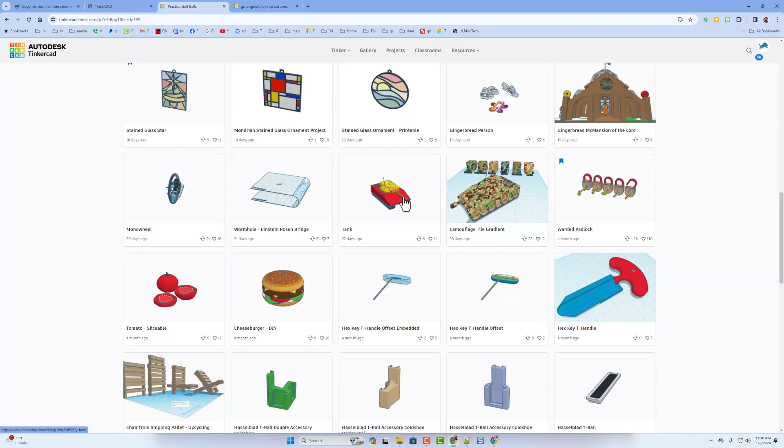Now he's also got the gradient. We're going to use both of those, but these are the steps you need to know. First, click on the design and then follow the golden rule of Tinkercad. Before you ever copy and tinker, make sure you give them a reaction. Then when you hit copy and tinker, after a moment it loads and we can start checking it out.

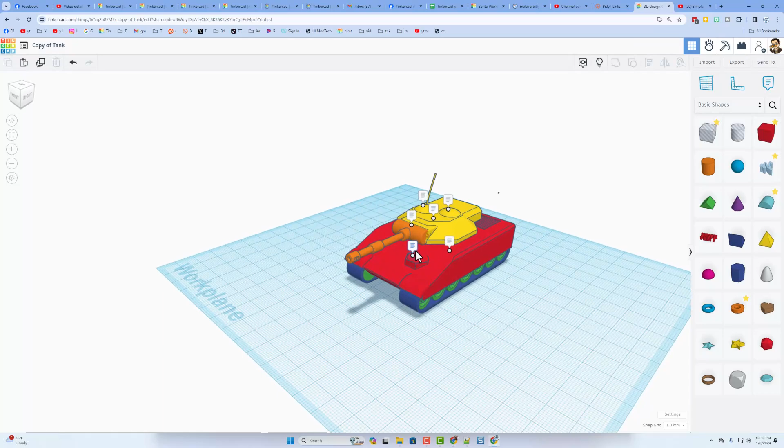ZDP was cool enough to add some notes. Let's check them out. The goal was to make a respectable looking tank that's quick and easy to draw using shape parameters. It only uses 75 shapes. That's pretty sweet. Notice here we've got a driver's hatch.

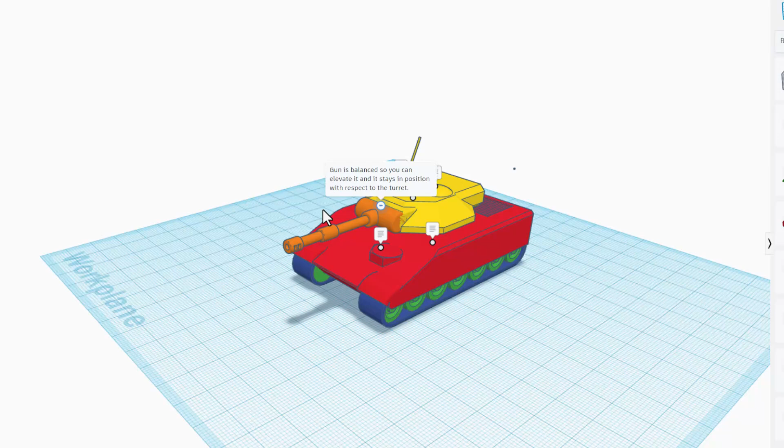Up here we've got a note that the gun is balanced so we can actually elevate it and it stays in position. There's also a cool note that if we select the turret and the gun, we can rotate them together. Finally, there's a gunner and a loader's hatch, and there's a commander's hatch.

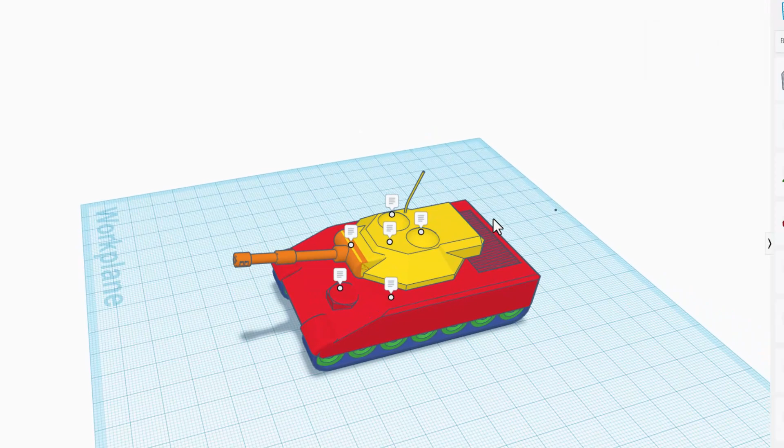So let me show you how this works. There is a tiny dot on it that balances it so it rotates around this center. Super slick technique. Now what ZDP said a moment ago is if you shift select these two, this dot, notice that link puts it exactly in the middle, and it rotates like that.

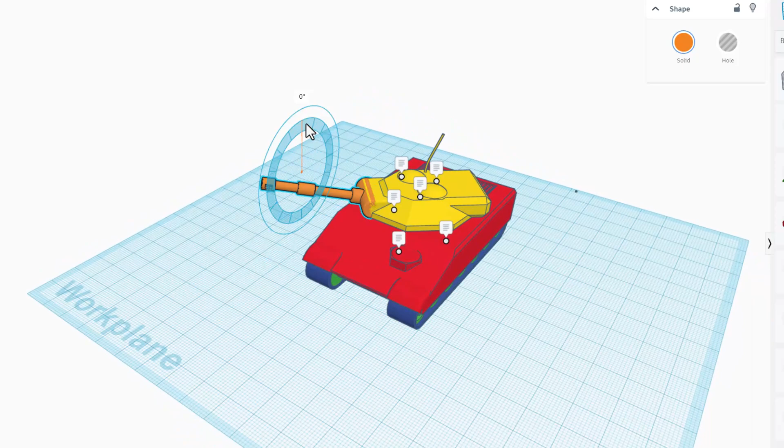Now I do have one thing I do want to show you. If you click off that and try and rotate this now, it does not work. It's in the wrong spot. So I'm going to do Control Z on that rotation, and I'm going to show you how to make it work. Notice how this is about the exact same angle.

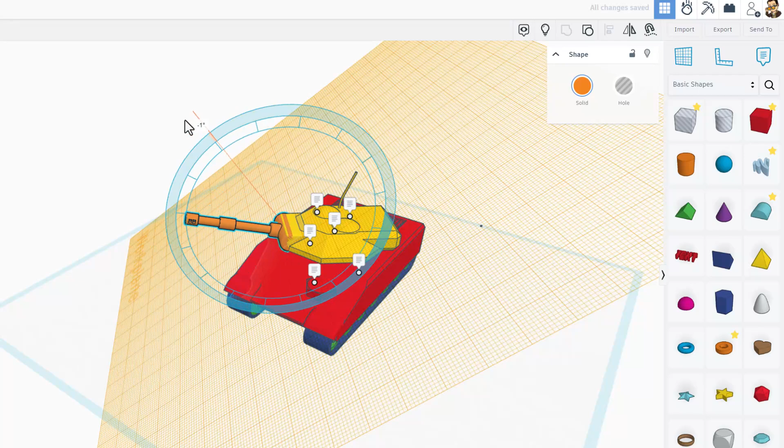If we simply put the work plane on that spot, so click work plane and set it right there, now that would rotate again if you wanted to adjust it from that angle. I am going to undo that by putting the work plane back and doing Control Z, Control Z, and Control Z. And then I'm going to shift select those two, and I'm going to get my turret back straight for the cool modifications we're going to do.

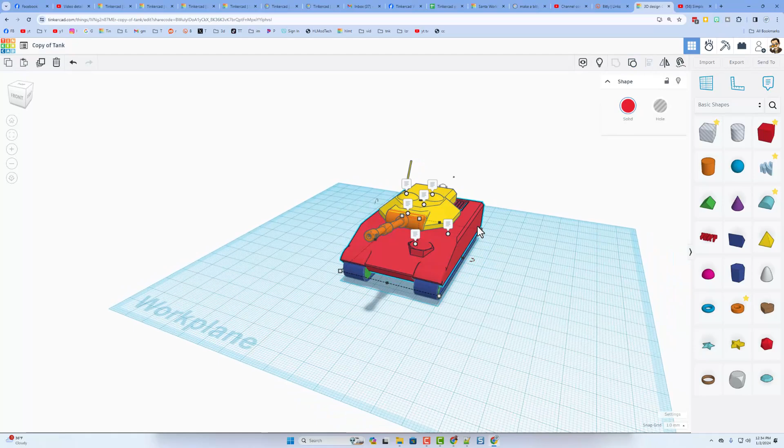I do also want to highlight that part of copying and tinkering is tearing things apart. Now you don't want to lose the original, so you can do Control D, do some shift nudges, and move that off to the side so you can always go back to how it looked.

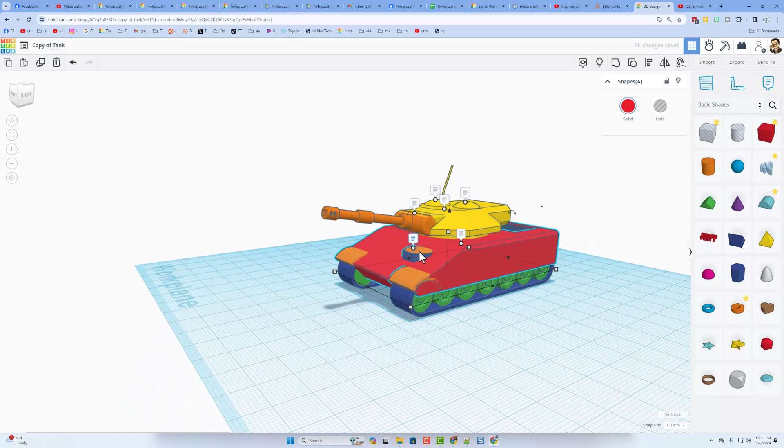But now you can click on shapes and ungroup them to see how things were created. Cool little curves added to the front, and there's the hatch. If you wanted the hatch to be a different shape, you can adjust it however you wanted. This is what copying and tinkering is all about.

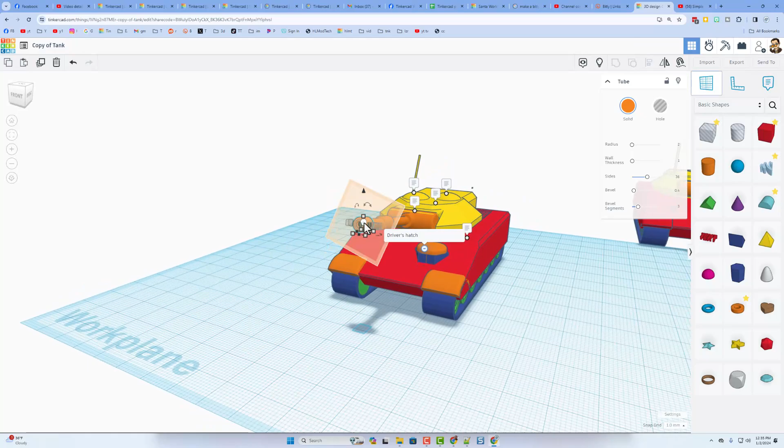You want to adjust your barrel? Ungroup it, click on a piece you want to change. I'm going to get the work plane so it's the same way, and I'm going to stretch it out, because I want it that way. Finally, put the work plane back down and make sure you group shapes as you make a mod.

Now for the rest of this, I'm going to back that up so it looks just like ZDP had it. And friends, let me show you something else pretty epic.

ZDP also has epic gradients. These are awesome camouflage, super cool, but I have an idea to use another user's cool share. This is by the Donut King. Once again, we will click on his profile to see all his awesome projects. Definitely worth checking him out.

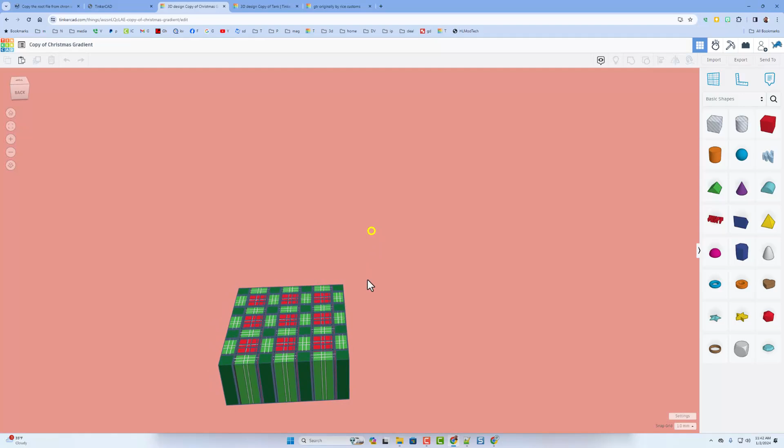I want to make my tank use the Christmas gradient. So let me show you how this works. Once again, before I copy and tinker, I am giving it a reaction. Then when I hit copy and tinker, after a moment it loads. Looks cool from every direction, and I want to use it in a different project.

There's two ways I can do this. I can just do Control C in this project, switch to the other project, and do Control V, or I can switch from basic shapes to my creations, and simply hit create shape, so this is always available to me. I need to wait a moment for it to load, and then I'm going to change the name.

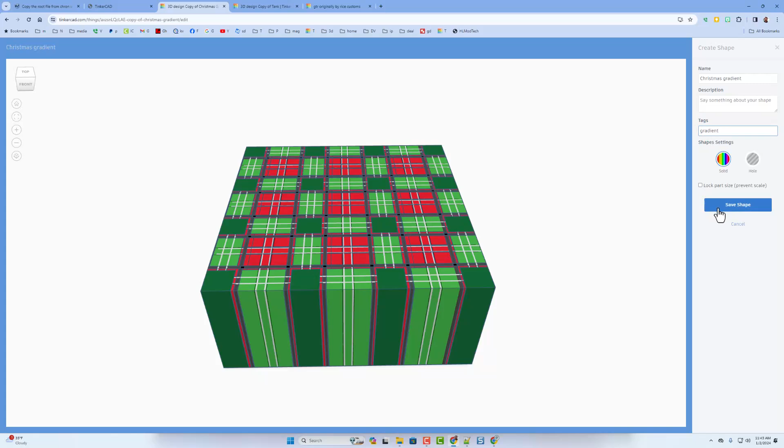I'm not going to describe it. I will put the word gradient, so maybe if I search gradients, I'll find these faster. I never lock the part size, and I'm going to save the shape. I am done with this project at the moment, so I'm going to simply return to my Tinkercad dashboard.

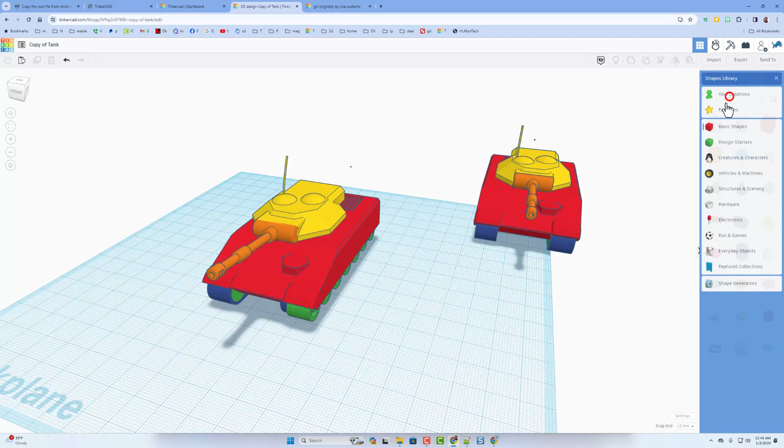And in the other project, let me show you how these gradients work. So the first thing I want to do is go to Your Creations, and here is that Christmas gradient. Notice it takes a moment for it to show up - I can't kid you, this did take a couple minutes. While you're waiting, you can switch back and forth as you're hoping for it to show up. But once it does, then you can put it to use.

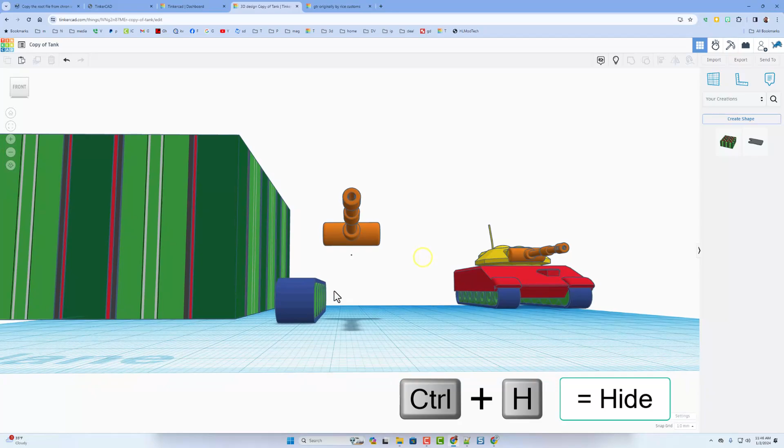So I'm bringing out this huge gradient and setting it down. I'm going to make the gun barrel look like this cool shape right here. To do so, I'm going to hide this piece, and hide all this. There's a tank track, I will hide that as well. Just a note, you can use Control H to speed up the hiding.

And now we're going to create an inverse hole. These are so cool once you get the hang of them. The first thing you need to do is bring out a block. I like to switch the color because the next effect shows up better when we do it.

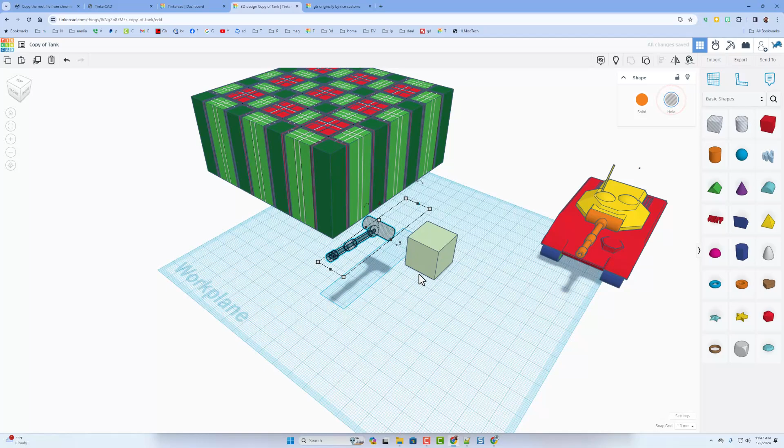We need to take our part and make it a hole. I'm going to take this block and stretch it larger than the shape. You want to give yourself a little bit of room to play. I think I'm even going to get the dot in there. I don't know if it matters, but it just seems like a good idea.

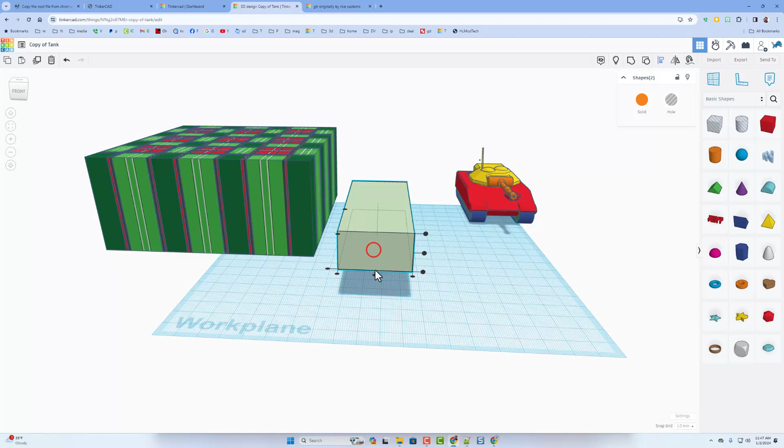And then I'm going to select that block, do L for align, and I want to make sure my shape is in the middle - this way and this way, and also this way - and hit group. Notice it said two shapes. These red lines are why I switched the color; you can't really see those on a red shape.

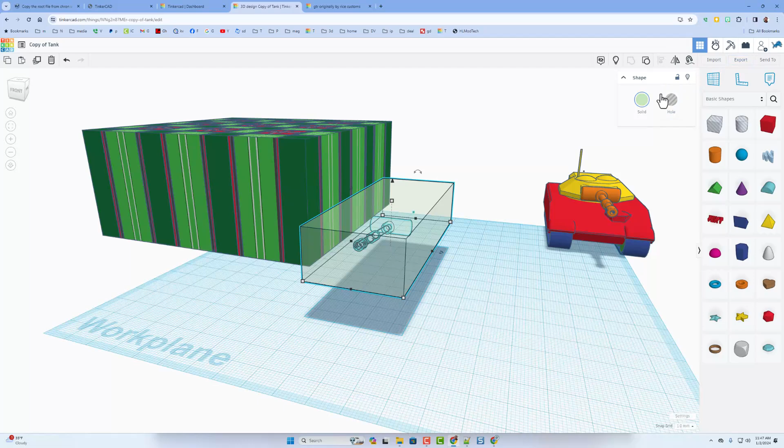This grouped pretty quickly. First, I'm going to show you T for transparent. There is our design in the gradient. Now I'm going to switch it to a hole so that this can cut. At this point, we put the gradient to use. I'm going to use it in this direction right here, and I've got to make sure it fits inside the shape, so I'm just squeezing it.

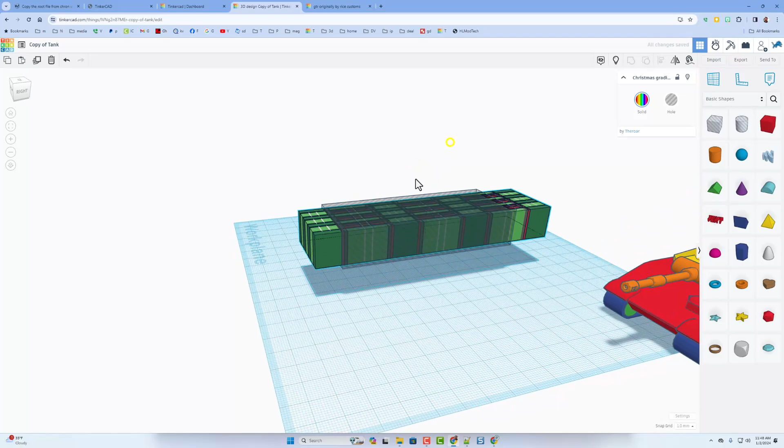I'm going to lift this up because it's easier to shrink it this way. Notice I'm using the black handles because it only goes one direction at a time—that's usually the easier way to do it. Making sure that it is all in there, we can select them all.

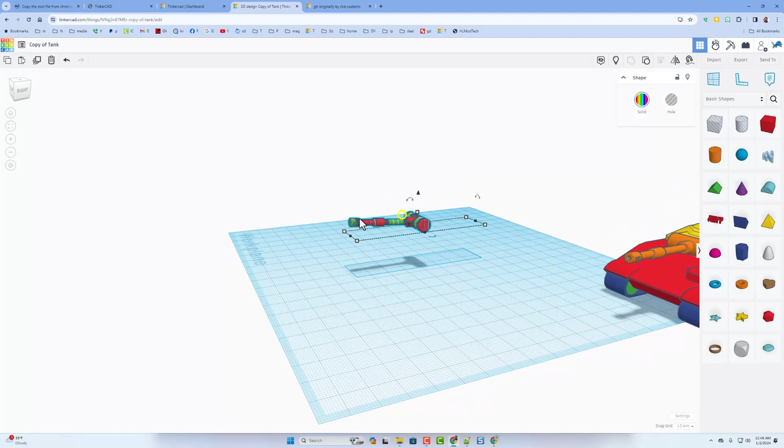I could do L for align, but I don't really have to. I'm going to simply group it. Once again, we've got the red lines while the grouping's happening, and all of a sudden our gun barrel has got an awesome Christmas pattern.

How cool is that? Real quickly, I'm going to hit show all to bring the rest of our tank back. That looks absolutely fantastic. Let me walk you through those steps one more time super quickly.

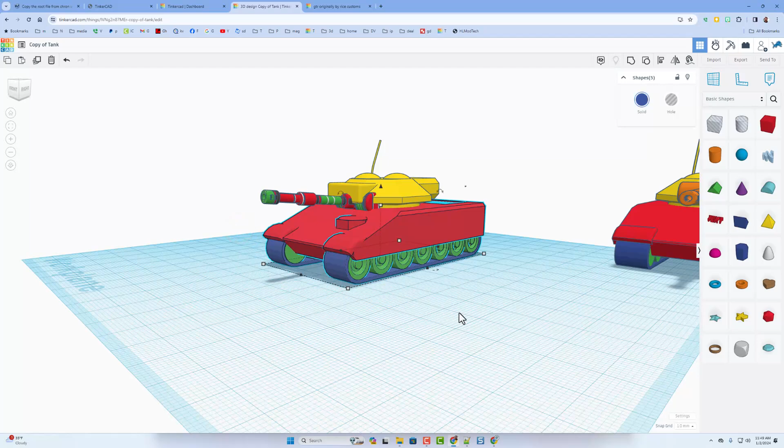So the part I'm going to do right now is the top part. I'm going to select all this and do hide. I'm also going to select my finished part and do hide as well. Once again, I'm bringing out a large cube, making it bigger than the shape, switching that color.

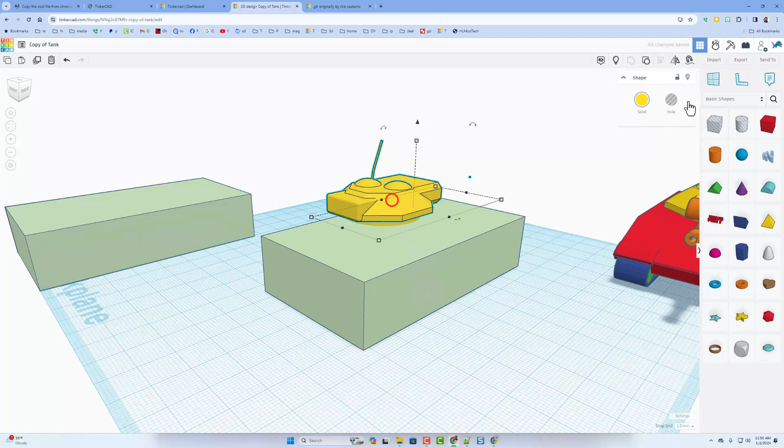I'm even going to speed this up by setting the large cube over here so I've got it ready for the next one. I can then turn this into the hole, and raise this one up. You can do Control Shift up, or you can also move it with your mouse, whichever way you prefer.

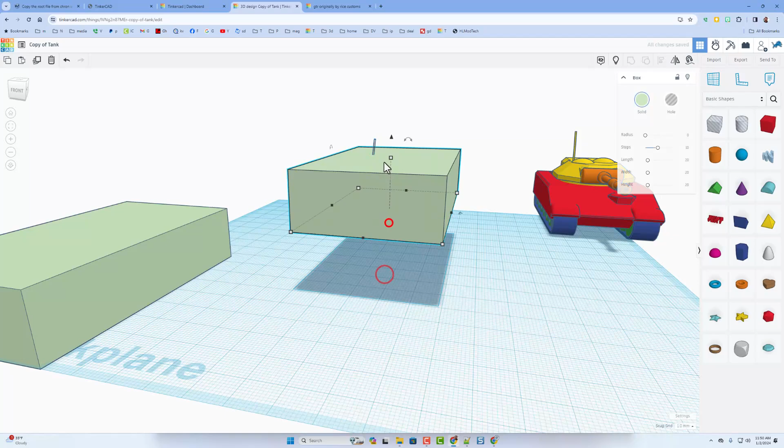I am going to do L for align, and because this is poking out, it's actually kind of slick because I want it to stay lined up with where the tank was. So I was able to select that, now raise it up. Let's see if I remember to make it a hole—yes, I did. So if I hit show all, it all comes back.

Real quickly, I'll hide these. Or check out this trick—I can also lock them. That way I don't have to worry about hiding them. It's efficient as well. When I do this, I want to make sure it says two shapes.

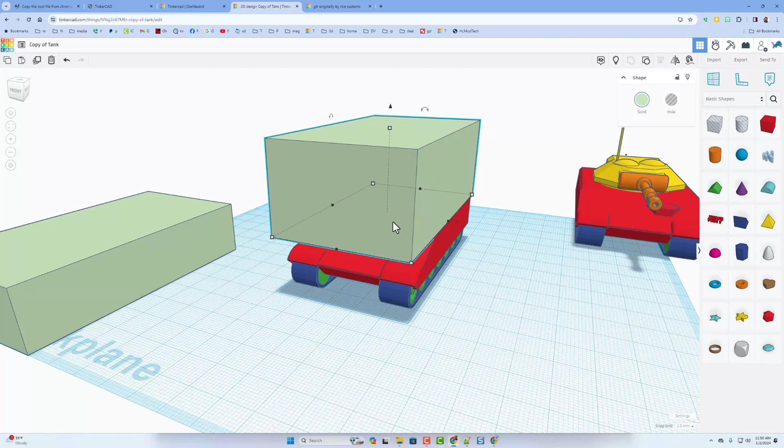And I'm going to hit group. Wait for the red lines to go away—note it does take a moment. Press T for transparent. Bingo, that cut just like we'd expect.

Now I can turn it into a hole, return to the gray hole, drop it out here again, and do the same steps to fit it in. Bingo, epic tank top, but I do have an error.

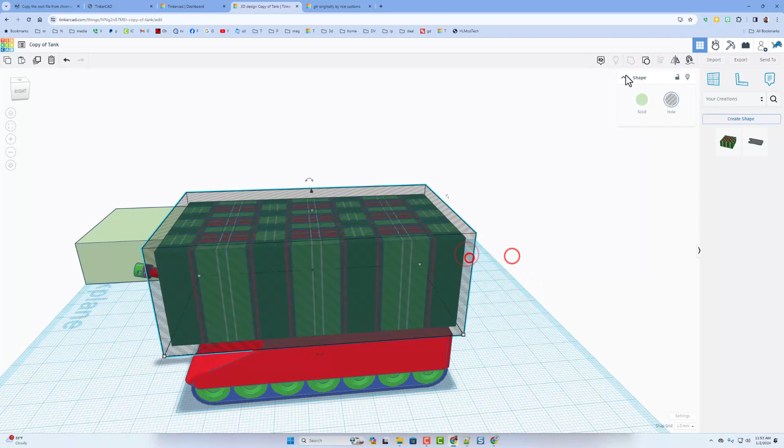Let me do a couple of ungroups and show you what I messed up. And I'm going to ungroup my hole. I'm going to shrink this down for a minute so I can hide that. And then right here is the problem.

I did not include this dot when I was making this. So I'm going to shrink this down really low. And here we are, friends. I had to stretch that out past that dot—I missed that when I did the cut.

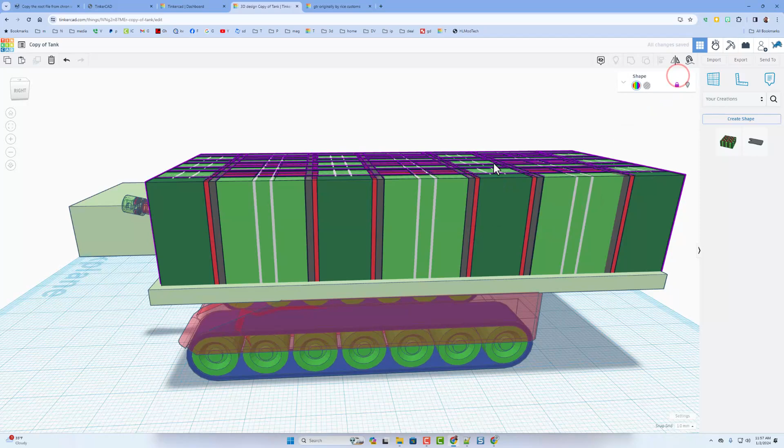So now, let's quickly do show all. Take our brick and make sure we have it locked. So I'm going to lock that so it can't do anything. I'm also going to hide it. Now I'm going to make sure this is locked. All of this is locked, so I'm good to go.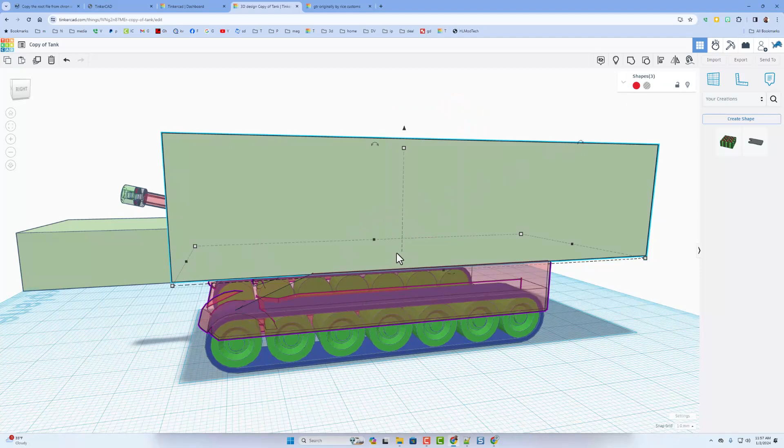So I can take this one and stretch it above the shape—remember, that is a hole. If I drag down and get that tank, it says 3 shapes, but all of those are locked. So if I hit group right now, and we hit T for transparent, make sure we're selecting the right one—bingo, there is the tank turret inside.

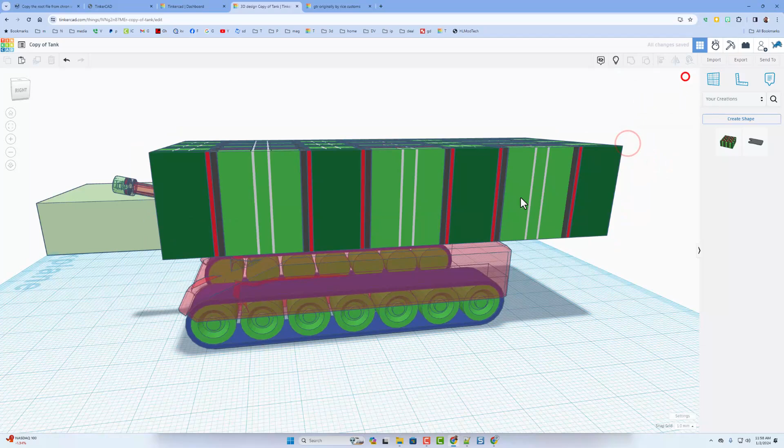I'm going to turn this one into a hole, and we do need to hide it for a moment. Now we can click on this and unlock it, show all, select them both, and finally Control G to group.

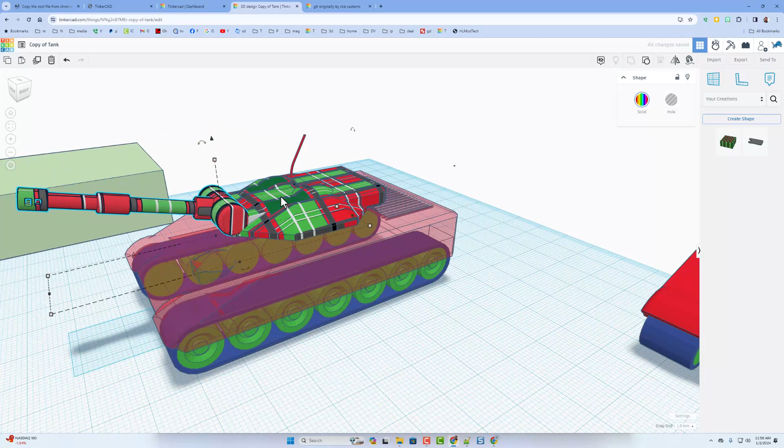Bingo, we have got our awesome tank with its turret. They both can be selected. I'm going to unlock those now so you can see this one still works like it's supposed to. I'll hit T to shut off transparency. And if I shift select, I can now use this handle to rotate them as they should as well.

Pretty advanced techniques doing that edit. If you do it right the first time, it's a lot smarter. I just lost my brain for a moment. All right, so I have wrapped it up. I am going to hide those notes again.

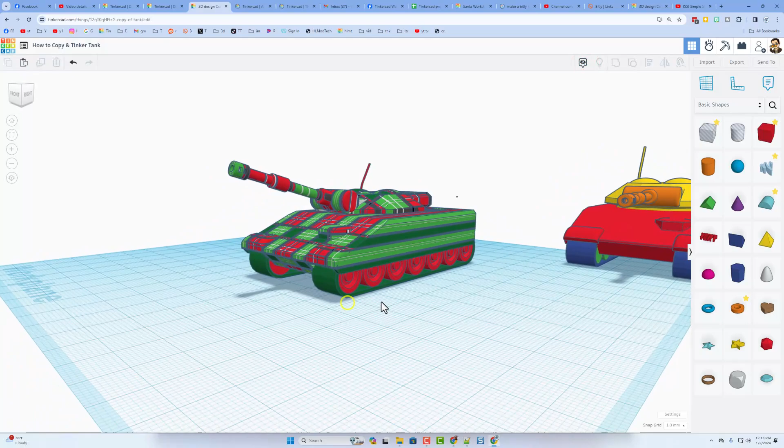Tried to change the angle of this to see how it would turn out different. And then also, if you copy and tinker, you've got to add something. It's not cool to just share somebody else's design. You need to actually add something.

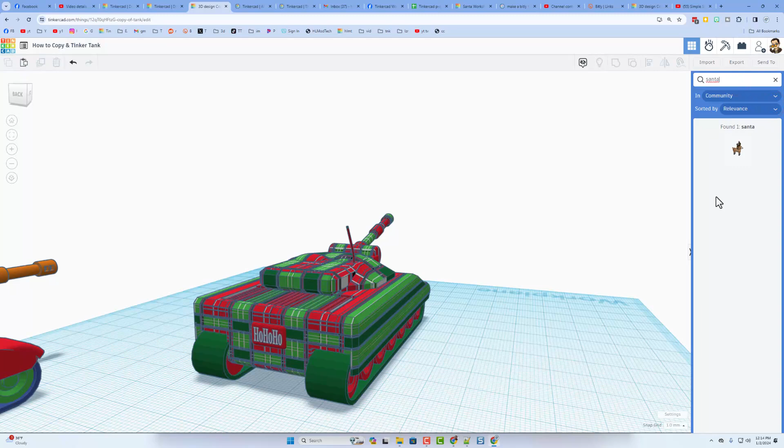Don't forget, there is a Tinkercad search tool. If we type Santa, let's see if some show up that are pretty cool. I don't have a Santa, but check it out. I do have a fun little reindeer. What if it was the reindeer in charge? I am just going to turn this around.

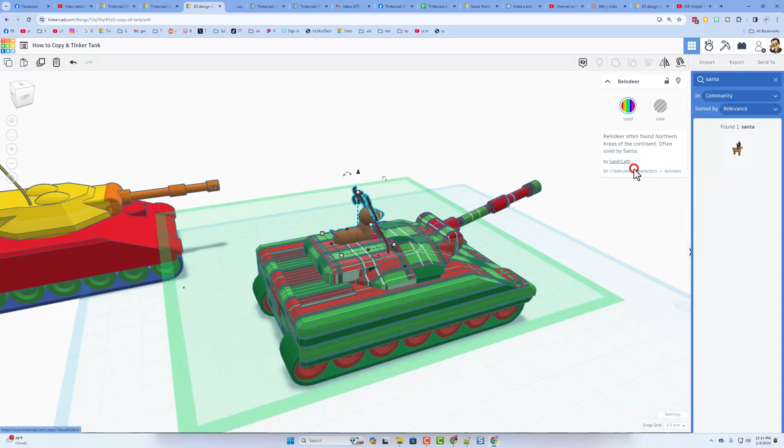And I'll put it close to the commander, and then I'm going to push it in just because it looks kind of funny. Now, I do want to note, if you look over here, this was created by Sarah Kath. Once again, I will give her credit in a minute. If you do open a new tab, she has so many awesome designs, totally worth checking out.

Spin around and take a look at the little reindeer. Once again, thank you, Sarah Kath. Of course, thanks ZDP, and of course, Donut King. These pieces are all fantastic.

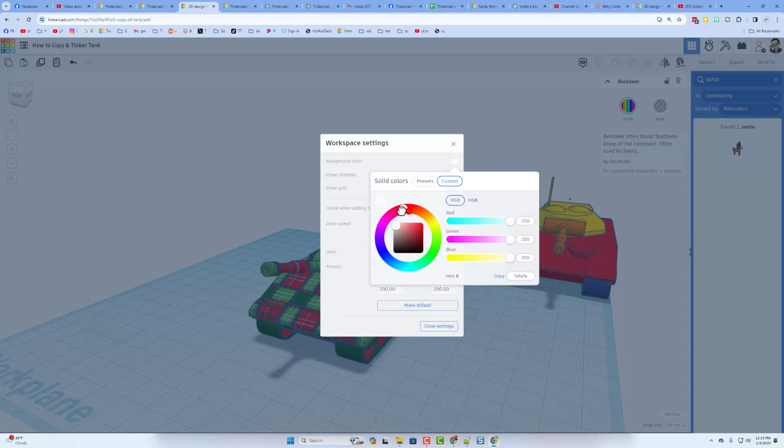I'm going to mod the background color real quick just because I think this always looks a little cooler. Let's go with some kind of Christmas reddish. And then I'm also going to hide the grid. That looks a lot cooler. I think I am done with the original tank, so I'm going to just hit delete on it.

And now we need to return, and I'll show you how to properly share your project. So of course, step 1 is to hit properties. Make sure you've got an awesome title. Of course, in the description, give the shout out to the users that helped you.

If you've got space, you can also add links to their profiles, which is an awesome touch. Of course, mine is going to have this tutorial linked. It does also have the link to the HLModTech search, another fine way to find those users. And then, of course, other ways to reach me.

Add some tags. And then finally, I want to remind you, if you add the HLModTech tag to any project you create, I check that tag almost every day. And of course, I'll give you a reaction. Finally, make your design public, and then I always choose attribution, no derivatives, because I'm looking for you to come up here, follow the tutorial, and gain some epic skills.